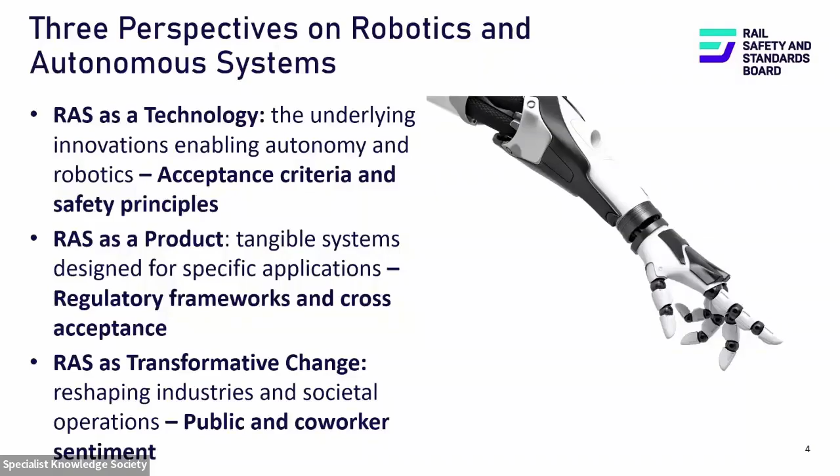If we think about robotics and RAS as a technology and as a product - I was speaking to somebody about what the solution to all of this is, and typically I was getting into details around regulation, and they said, 'Look, this is quite a simple problem, it just has to be very cheap.' I think that's what you're really talking about - once this becomes cheap, there won't be any barriers.

So it's useful to think about the archetype pathway to becoming cheap. We start with early adoption and development happening in labs - I'm sure my colleagues will tell you about the wonderful stuff they're doing there. Then you get into early adoption, high cost, niche, government investing in things, seeing it as strategic investment, and allowing this first adoption to occur.

Then scaling and competition - some degree of standardization, interchangeable components, supply chains form. RAS becomes a market in itself, a mature market. We start to see economies of scale, and standards start to develop - there already are some, but even more sector-specific and cross-sector ones.

And last but not least, you get demand driving production, and suddenly the technology is cheap enough to be in our homes. If you think about the autonomous Hoover you have in your house, all of a sudden it's in your house, and that's one of the reasons it's affordable and available to consumers.

The question is, where are we at now? We can debate this in the Q&A. Maybe we're in the early stages, specific niche applications, and the real idea is to move into that space, to get into scaling. So scaling is the big problem - there's the problem of early adoption, which I'm sure my colleagues will talk about, and people actually implementing RAS. But from a regulatory and governance perspective, the big question is, how do you scale this up?

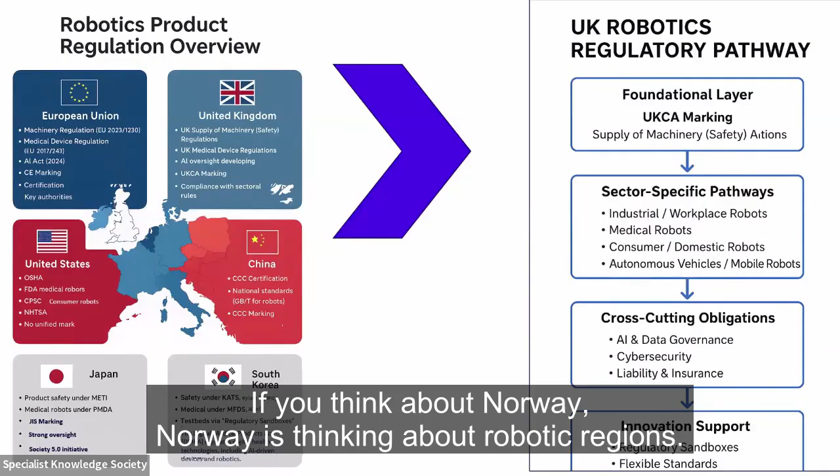So very progressive thinking. If you think about Norway, they're thinking about robotic regions. We are starting to do that with RAS hubs that the government has announced. So there's a lot to borrow and learn from other sectors, and really there's an opportunity here for the sector to improve.

We're an interesting case. I think, Mark, you talked about the fact that we are third. I've heard we are first in research. We're third in private sector investment, believe it or not, in early adoption. We are, I think, top 10 in autonomous vehicles, ninth, so we can move up, but certainly in the top 10. We're seen as incredibly mature when it comes to robotics and regulatory frameworks.

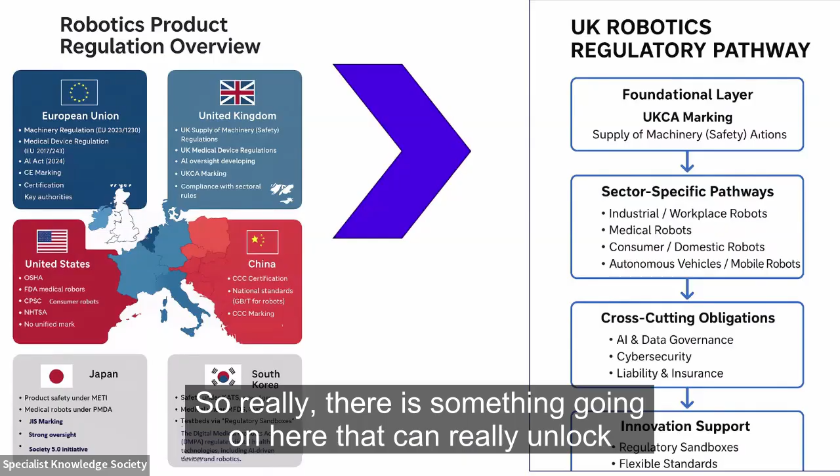But we're poor in deployment. I think robots deployed per 10,000 manufacturing workers, I think we have something like 112. And just to put some perspective on this, Korea is at about 1,000. Okay, that is the difference. Deployment, we are far behind, which does not make sense based on what I just said, how far ahead we are. So really, there is something going on here that can really unlock the potential that the UK has.

And this is why the committee exists. I'm one of the co-chairs. It's co-chaired by colleagues from NNL, from University of Birmingham with Samia Nefti-Meziani OBE. Also HSE is involved, and we are very, very active. It's a very diverse membership, with government bodies, regulators, standards bodies, infrastructure managers, covering 16 sectors of economic activity. And the big idea here is to connect regulators with organizations that are developing robotic solutions and see how we can find a way forward. I think that is the real unlocking factor here.

A brief history of the committee: formed in 22-23, worked with the ministers. There was a task group set up and a regulatory scan proposed somewhere in '24. We've had some very good discussions with DSIT and RIO and people who run those departments to see how we can support the sector and make some genuine recommendations back to ministers and people in power so they can unlock things. And we're very, very keen to work with people possibly online today or here, so please do discuss stuff with us.

Very quickly, the last bit of work we did, we talked to around 60 organizations, a lot of work, a couple of workshops to really explore what the challenges were, to really talk to the community to understand what is stopping robotics from being deployed.

And two key lessons came through. In some cases, there were some fundamental problems with the existing legislation, and legislation change is very difficult, so you have to lobby and convince government to really do that and highlight the benefits of it. And the other bit was the perception of what the regulatory mechanisms and the burdens that come with it, the concept of regulatory burdens. So in some cases, even if the regulation wasn't the factor, the perception that the regulation creates a burden, even if it's not true, was a big factor.

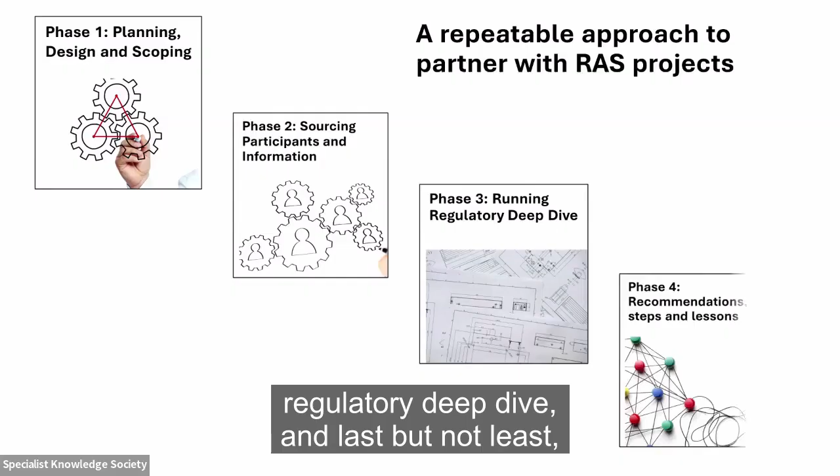The big focus is some kind of repeatable approach: really planning, scoping, designing. I'll speak a little bit about sourcing participants and information, a regulatory deep dive, and last but not least, some recommendations back to government. The idea is for this to be a repeatable process so that the committee can consistently every year work on one, two, three projects that are out there and really get the lessons out.

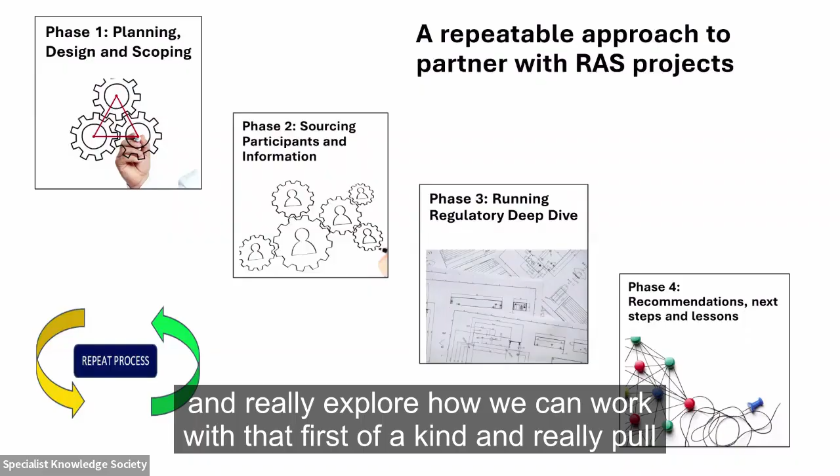The key thing I pointed out before was scaling. So the scaling could be a common application which can be moved across. It could be across regions, it could be across sectors, and really explore how we can work with that first of a kind and pull the lessons out so that the second person doesn't have to start from scratch. I think that's the key thing we have to unlock.

Things to think about that we will certainly consider is, where's the technology at? What is the technology readiness level? Are we talking about places which are ready for deployment? There are companies out there who have a robot but just can't find a place to deploy, a customer to buy it, and there's an element of proving it. Or there's an area of opportunity where some regulatory change can really unlock something big for robotics.

Cross-sector applicability, as I talked about, is quite important. Deployment environments which are common, construction sites, depots. So if you have a maintenance depot in rail, how is that different to a maintenance depot for aviation? If somebody is deploying drones there, which are autonomous, can it be done in the railway as well? What are the challenges associated with that?

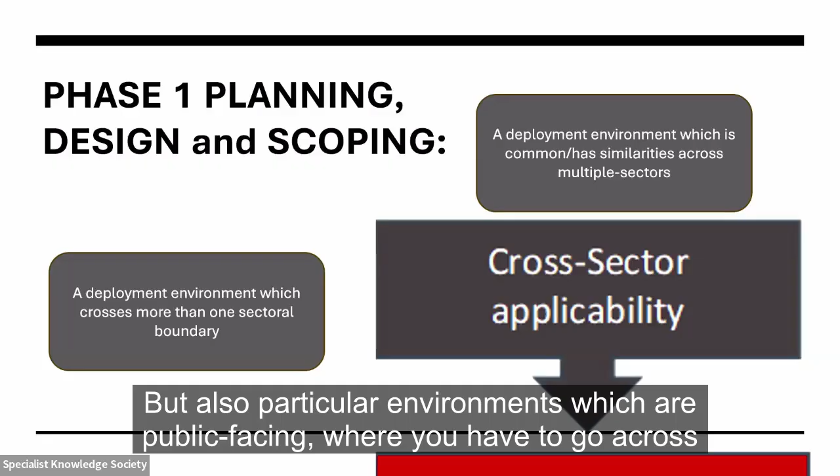But also particular environments which are public facing, where you have to go across multiple regimes - in the agri sector, if you're deploying robotics, it has to cross a road, suddenly highways aspects apply, you go to another site. So there could be all sorts of challenges associated with deploying robotics.

I talked about RAS exposure to the public - what are you talking about? Controlled environments, exposure to public. The Milton Keynes example I was talking about, a robot running around doing logistics - if you prove that, to what extent can a robot be deployed in a station environment? Discuss what are the challenges. So there's clearly room for extension, but somebody has to do some thinking around that.

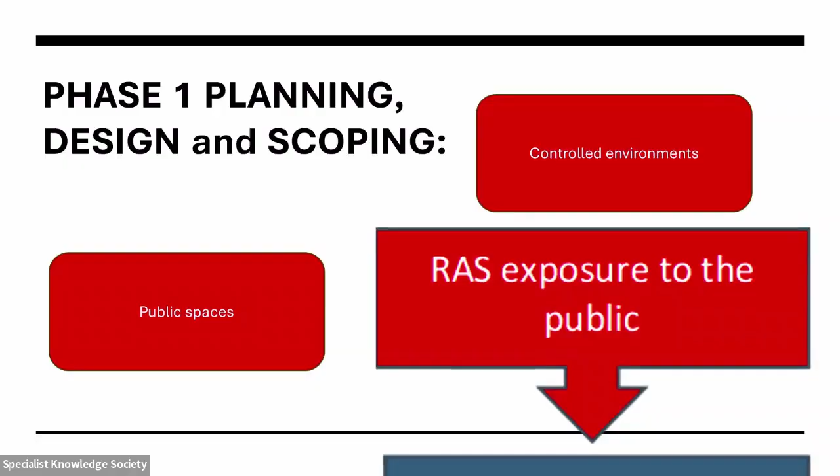Level of regulatory change - what's the problem? Is the problem regulation, or is this just the perception of a regulatory burden? Is it lack of data, risk assessments? You don't have criteria, and how can we unlock that? The committee is very keen to work with people to unlock that where possible, because we have access to regulators - I can see some of them in the audience. Hopefully they won't be too unkind to me afterwards.

The other aspect here is really the scale of the benefits. What are we talking about? Does it unlock a pilot scheme, a deployment? What does this mean for the sector? Does it position the sector to really transform and put UK on the map in relation to a particular sector or not? So I think those are the kind of considerations.

The idea is to then highlight some cases and work with them - like I said, we're working on a couple already. Just to give you a rail example: one of the things we're doing, it sounds very simple, is to explore and examine the standards that exist, operational standards for example, and really see to what extent they are ready for a robotics, for a RAS system to be introduced. Are there any challenges?

Do the people working in that environment have to do things differently? What are they? I think unless we proactively think about this and start to provide opportunities and test beds, I think we'll be forever behind. So I think there's a real chance for all the sectors to really grasp this opportunity and proactively think about it.

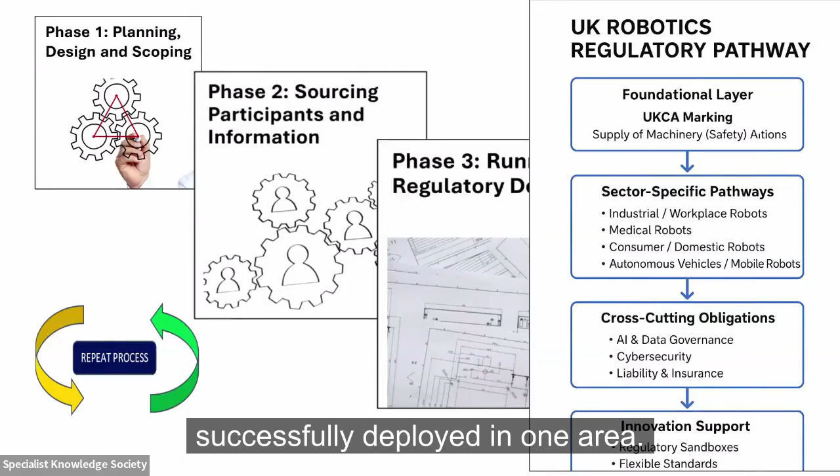Like I said, we're in phase 2 and 3, speaking to people. We'll do this again. If you have ideas, you want to work with us, please reach out. We're happy to listen. Hope is that we will get some regulatory pathways going, try and understand how a particular project has been successfully deployed in one area. What can we learn from that? How can we take it across? And maybe during Q&A, I can give you some more examples.

And the expected outcome, this is the last slide, is that we identify specific barriers, there's bits of knowledge and archetypes and knowledge products that we pick up from our experience working with partners, and that can be made publicly available. I think that's essential, publicly and freely available for projects to really use and publicize.

The committee is really there to do its job, to really put RAS on the map, but also really reach out to people who are trying to break into the market to say, is there a way we can link you back to regulators to really understand? Can we provide sandboxes? Are there opportunities here to really help awareness and support you and hold your hand while you try and attempt to implement the pilot?

So I'm not a robotics expert, but as you can see, I'm really excited by this, and I really want it to succeed. And I will pause there because, to be quite honest, I want to see all the cool videos that the rest of the panel will share with you. So thank you very much for listening.

Thank you so much for giving us a great introduction to our topic this evening, and explaining the work of the National Committee on RAS Regulation, Standards and Ethics, which I think gives you a sense of the work being done to really be proactive, bridge that gap between developers and those who understand the regulatory landscape, to really accelerate the deployment of robots that are safe and trustworthy and bring societal benefit.

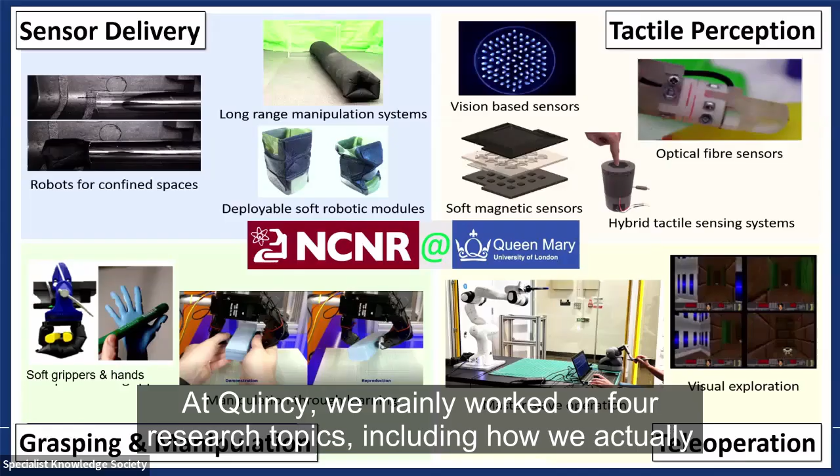So at Queen Mary, we mainly worked on 4 research topics, including how we actually deliver the sensor to the site, which is dangerous for our human workers, so then we can see the environment that we couldn't see before. We have such robotic systems with sensors, and we can deploy manipulators where we can actually grasp or pick up those dangerous objects remotely. And then we have teleoperation, which actually enables our human workers to stay in a safe environment, but precisely control the robots that have been deployed inside those dangerous environments.

And so, as mentioned, robots are smart machines. So if we want to design a machine that is smart and robust, that can be deployed or brought outside of the lab and placed in the real environment, not just in the lab, the first thing we think about is the design philosophy.

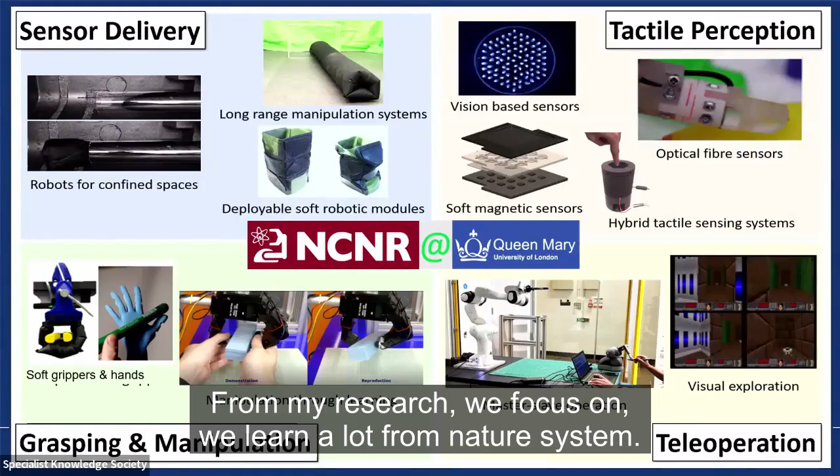From my research, we focus on learning a lot from nature's systems. If we look into our human bodies, we have rigid parts as skeleton, soft parts like tissue and muscles, and then we have our brain to control. How do we control our muscles? We learn gradually from a child, kids, and toddler. We grow up, and then we learn a lot of skills. That is what today the AI is doing.

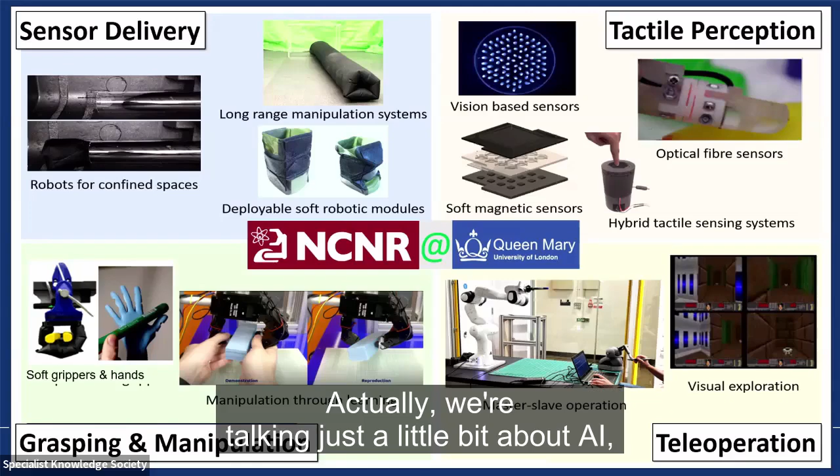We're talking just a little bit about AI, how that can be deployed to a smart robot, which is an embodiment of the AI. So here we talk a bit about how we design mechanically intelligent bodies that can do the work with very limited control requirements.

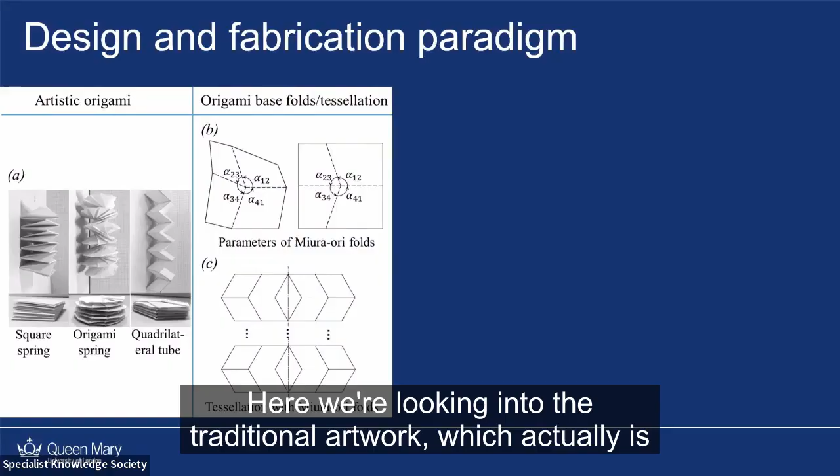So here we look into the traditional artwork, which is the art called origami folding. We learn from origami folding from this artwork, so we can understand how to use basic geometry to understand the folding from a piece of paper to a compact 3D structure.

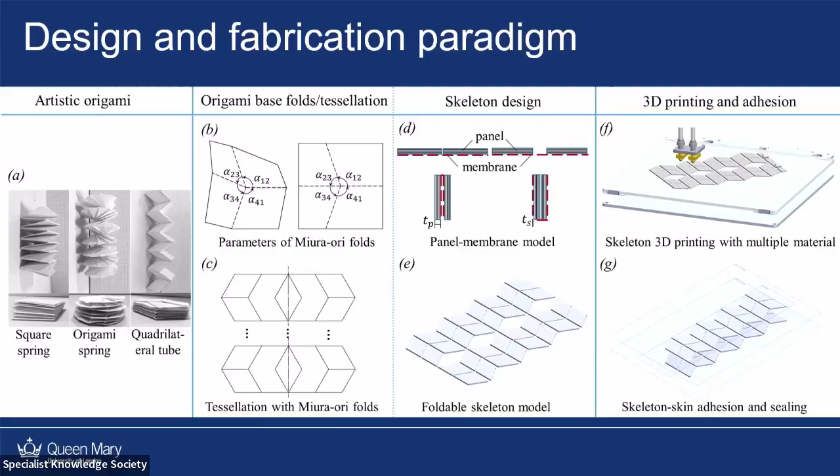And then we develop the design approach, and we can look into the new manufacturing approach, like how we use 3D printing to print a piece of flat sheet, and then we can fold it into a 3D structure.

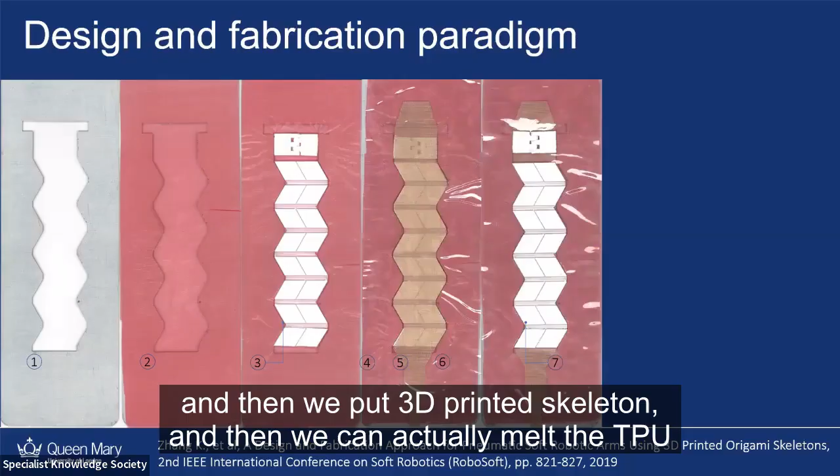We use this heat pressing manufacturing process, using plastic fabric materials. We use a very basic aluminum mold, put in a 3D printed skeleton, and then melt the TPU film materials onto the skeleton. We use other non-melting material so they can create chambers, which allow us to inflate and deflate the structure.

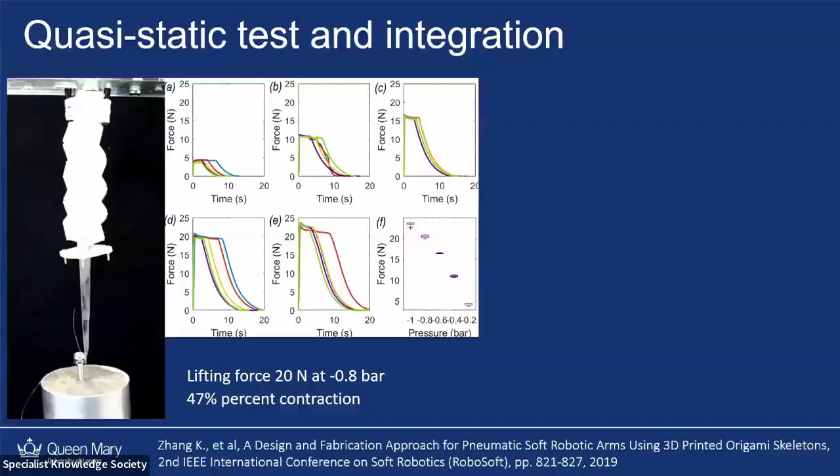So this is the whole manufacturing process, which is cheap and makes the body very reliable, with no electronics inside. And then we can make the artificial muscle here.

You can see the video - we can vacuum the muscle, and it can lift quite a heavy payload compared to its body. So this is a kind of new artificial pneumatically actuated artificial muscle.

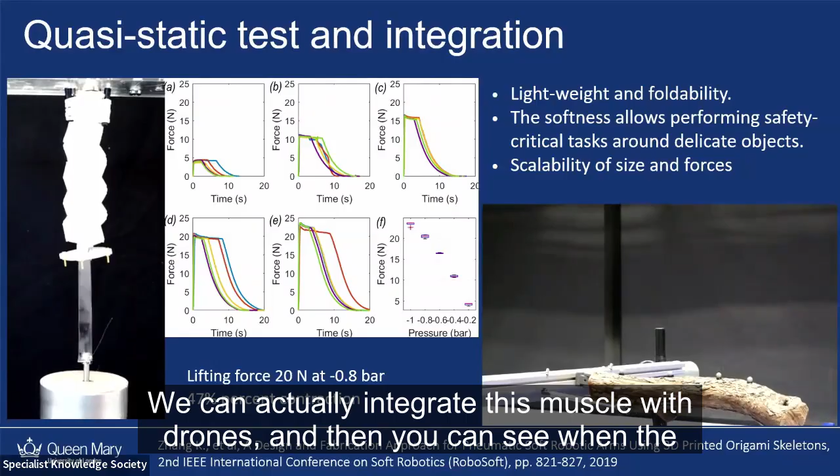So you may ask, what kind of applications? We can integrate this muscle with drones, and when the drone flies in its path it can have a kind of collision with the environment. That softness allows the drone to pass through without getting damaged from the collision.

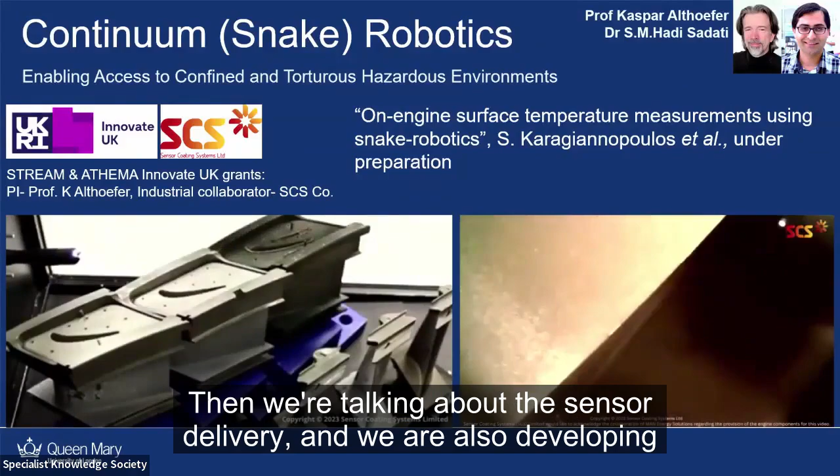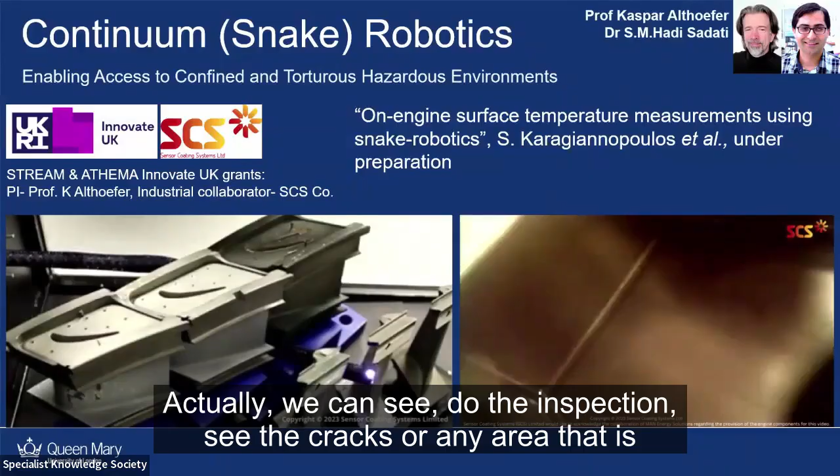We're also developing snake robots, shaped like a snake, which can go through very narrow openings. It's remotely operated with a camera - just minimum electronics put at the tip of the snake robot - and we can do inspection, seeing cracks or areas not accessible to larger robots.

This part of the work was funded by Innovate UK, led by Professor Kaspar Althoefer, who unfortunately isn't available today.

Again, what I want to emphasize in our work presented here is trying to minimize the application of electronics, which is one of the weakest parts when we deploy this type of robot in a nuclear environment, because that part is the most easily damaged.

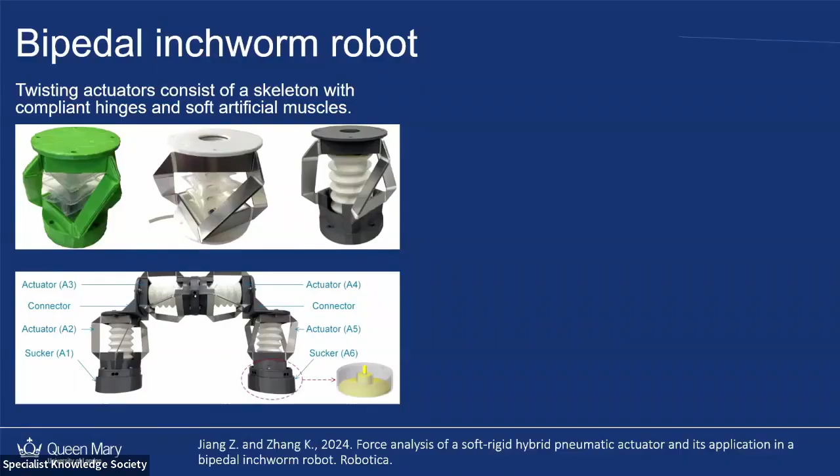So here again we look into the soft muscles and learn a bit from our human body. Our hand can do very precise grasping or gripping because of the skeleton bones in the finger - that allows the precise motion. So when we integrate the hard parts and soft parts, we make a hybrid system.

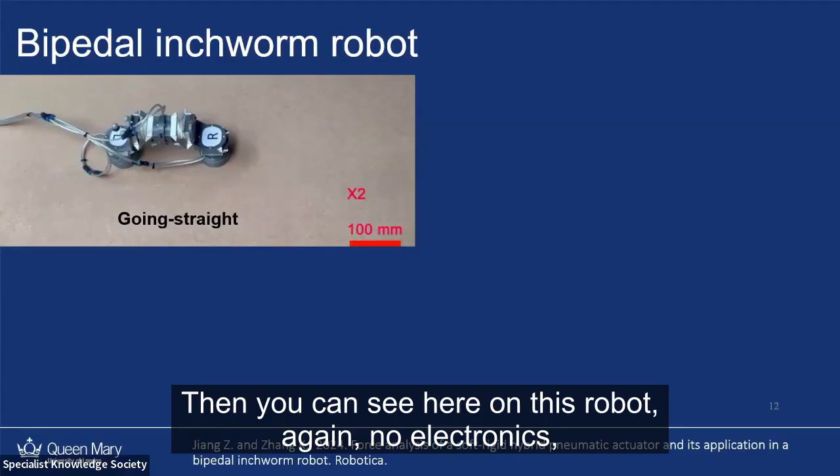And so we learned about the gait. We developed these two-legged robots, and you can see here, again no electronics - we remotely control it by pressure, air pressure, in the soft muscles. You can see we can allow the robot to locomote.

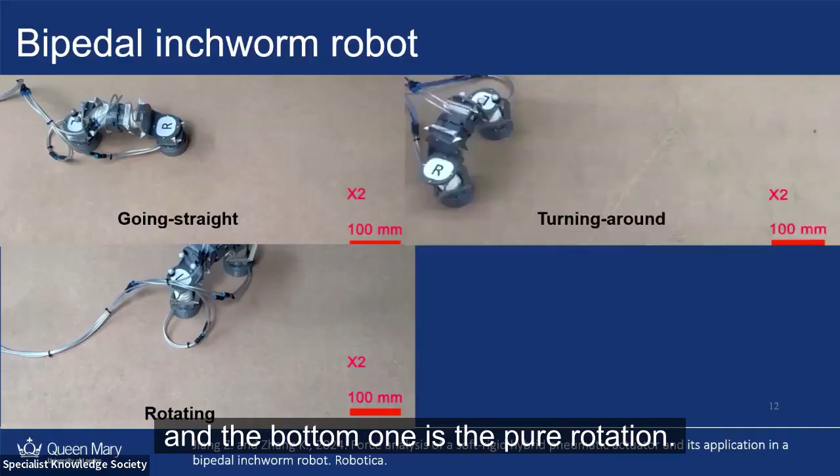Interestingly, with this same robot, we can achieve different gaits. From the top one is the straight locomotion, and the bottom one is the pure rotation. We can combine the turning, like a crab, but it only has two legs. And of course we can change between gaits, which allows the robot to navigate through narrow channels.

Here we try to provide a very narrow opening to allow the robot to go through, because it can change the gait. So again, this is just mechanical intelligence with no electronics.

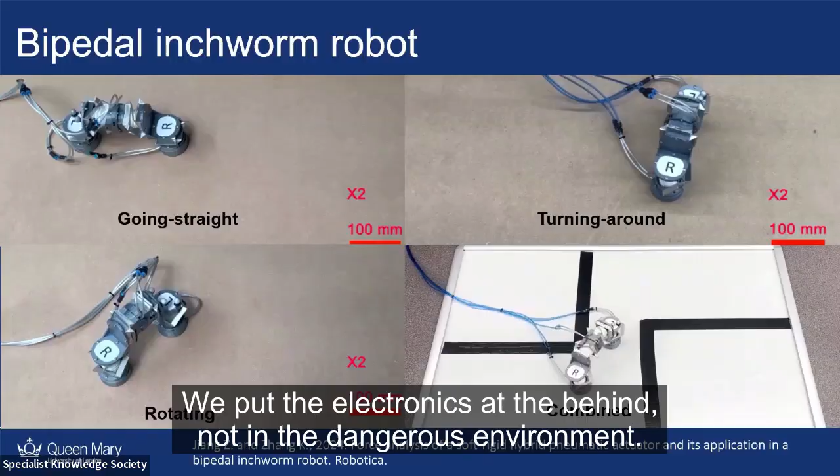Okay, and we put the electronics at the back, not in the dangerous environment.

After that, we also developed this variable stiffness device. We want the device to have different stiffness that can change, where we want them to be soft they can change to a lower stiffness, or we want them to be able to carry more payload. So this is an experiment test of this new kind of rotary joint, again powered by pressured air.

Let's move to the next slide.

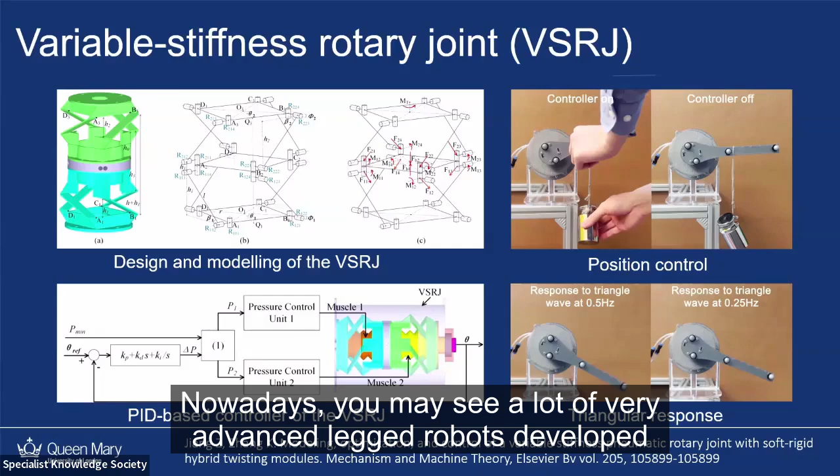You may ask, okay, what can the joint be used for? So using the joint, we developed this quadruped robot - basically a four-legged robot, and we use 8 of the variable stiffness joints to develop this quad robot. Nowadays you may see a lot of very advanced legged robots developed by Boston Dynamics or Unitree, but they all have electrical motors. For us, our aim is to develop minimalized robots with minimized electronics on their body.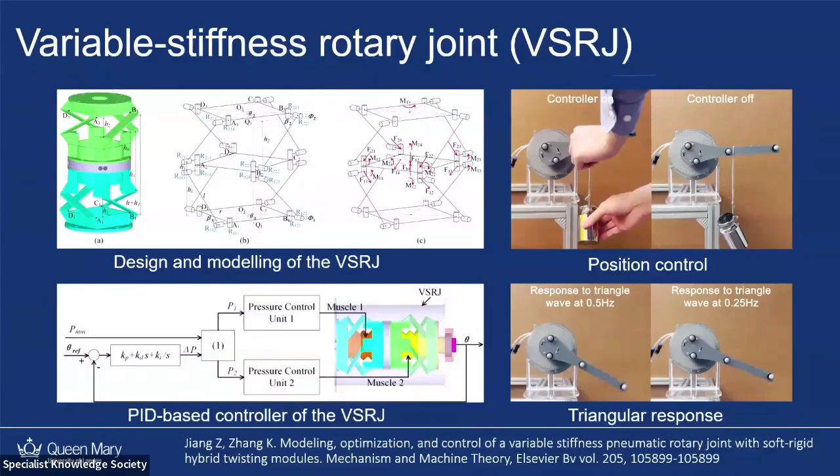We learned that pneumatics have their disadvantages - they have pressure drops, and if you have very long tubes you need very high pressure. So something always has advantages and disadvantages, and that is what we are trying to improve.

As I mentioned, we want some end effectors to be able to grasp objects in dangerous environments, so we developed this soft gripper. Inside this one we have just 2 motors - we try to minimize the use of electrical motors and circuits. All the fingers are made out of soft material, using the TPU pulse actuator to change stiffness.

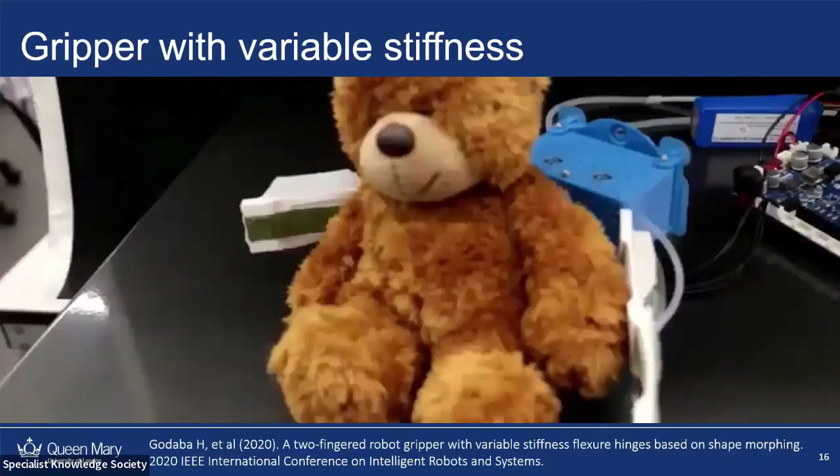If you look at our finger, the last 2 digits are coupled, so we can't bend these 2 joints separately. But with the new pulse actuator, we can actually bend that finger separately, meaning we have more configurations, and we can change their stiffness to allow them to operate for different functions.

Lastly, you may think, okay, so can these robots only be used in dangerous environments? But it's not. Here is our current work, funded by Innovate UK, as Mark mentioned earlier. Indeed, soft fingers can be used to grasp soft fruits, like red fruits, and this is our work working with Saffron Grange and Extend Robotics.

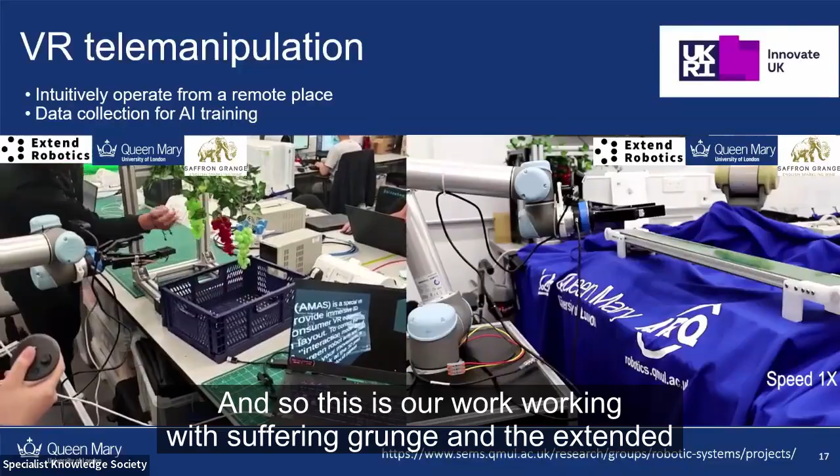Saffron Grange is a vineyard near Cambridge, and we put the soft fingertip there. It also has a sensor embedded, allowing the fingertip to test how much force is applied on the grapes or on the bunch.

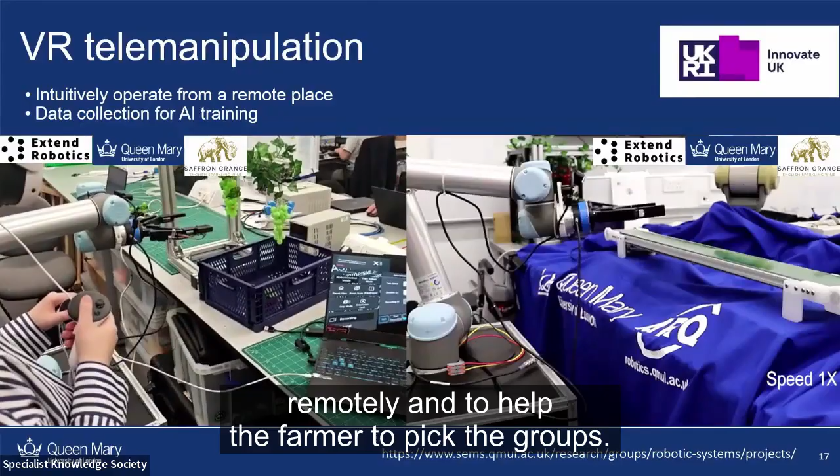Then we can use VR-based teleoperation to operate the robot remotely and help the farmer pick the grapes. But what I'm presenting here is that this robot can also be used in places like nuclear facilities, where the operator can sit far away from the dangerous environment or the operation site, but can still accurately operate the robot to pick up the bunch.

The peduncle is just about 3 millimeters in diameter, so it requires quite accurate operations.

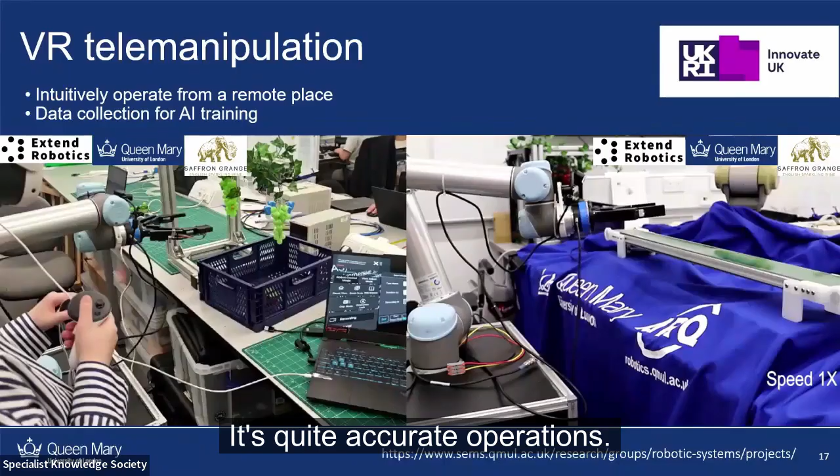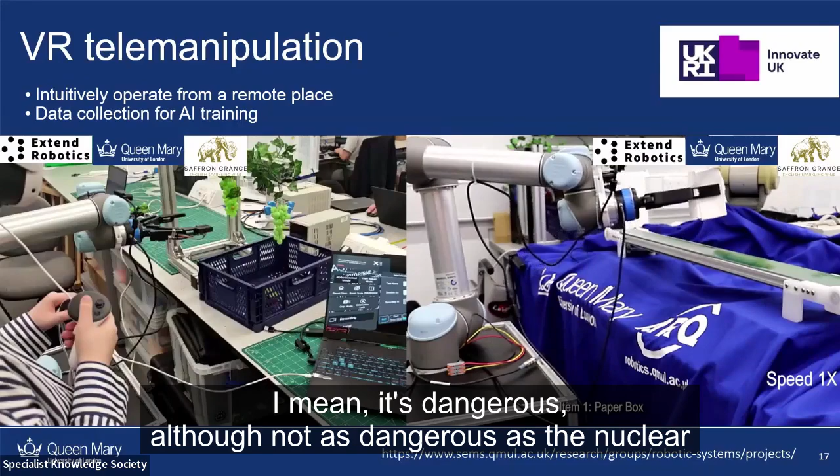We're also looking into applications like deploying these robots in waste recycling facilities, when the waste is moving on the conveyor belt. A visit to the site is dangerous for human workers - not as dangerous as a nuclear environment, but still not a nice environment for human workers.

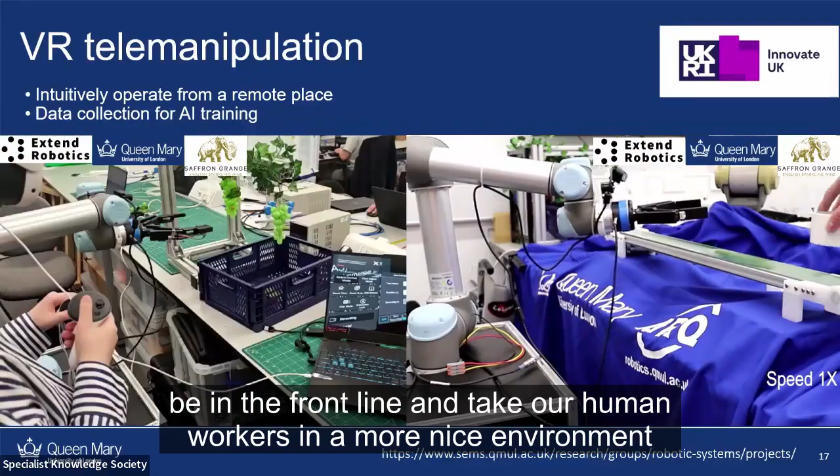So what I want to say is robots should be deployed to the environments where they should be - maybe not ready for our homes yet, but in these environments we definitely need robots to be on the front line, taking the place of human workers in a more nice environment, to reduce the risk to their lives.

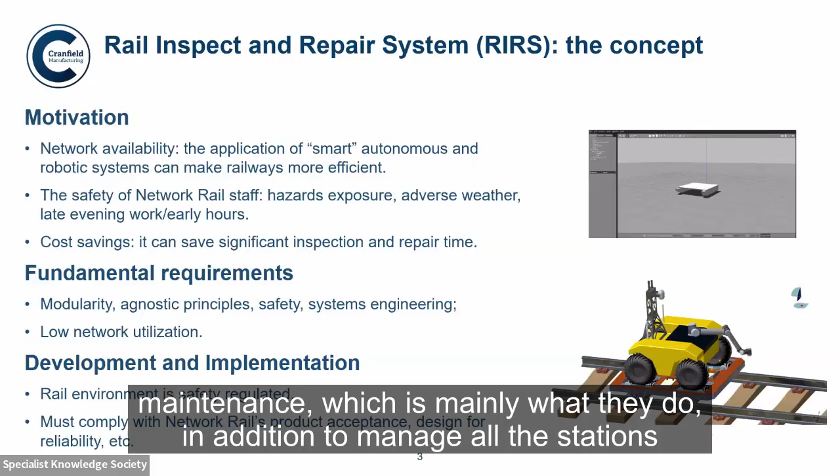The reasons for using robots for the railways are to do with safety. So you think about when Network Rail is able to perform maintenance, which is mainly what they do - in addition to managing all the stations, they also maintain the track and so on. The times they have available to do maintenance is usually in the middle of the night, and it'll be outdoors, and it doesn't matter what time of year it is - it might be raining, it might be snowing - there's a lot of difficulties with people doing jobs in this sort of environment. So this project has to do with this.

The idea of this concept is to do with this. Obviously, we can think about using robots as very efficient, and they would save time as well in inspection and repair routines. So as part of the brief for this idea, the fundamental requirements - there's a long list of requirements, but I will cite a few that are very, very clear.

For example, modularity in the design, so it will be very easily repairable. It has agnostic principles, meaning it doesn't matter if it's an unmanned ground vehicle or a drone or some other form of platform. It will also be agnostic when it comes to the type of task it will do - it's sort of like a free concept in that sense.

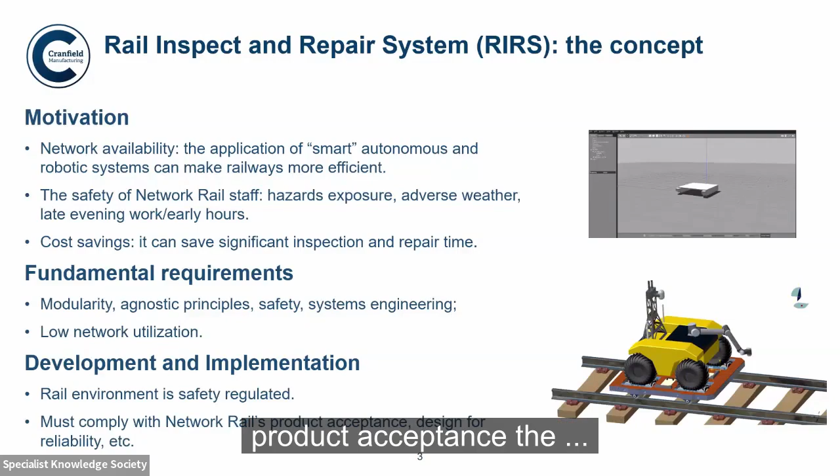The idea, obviously, is that it reduces the time machines are there to do maintenance, because these vehicles can jump in and out of the track, so the track becomes free. And, as we heard today, there are a number of safety regulations, and this is quite important for the railways. We must also comply with product acceptance, design for reliability principles, etc.

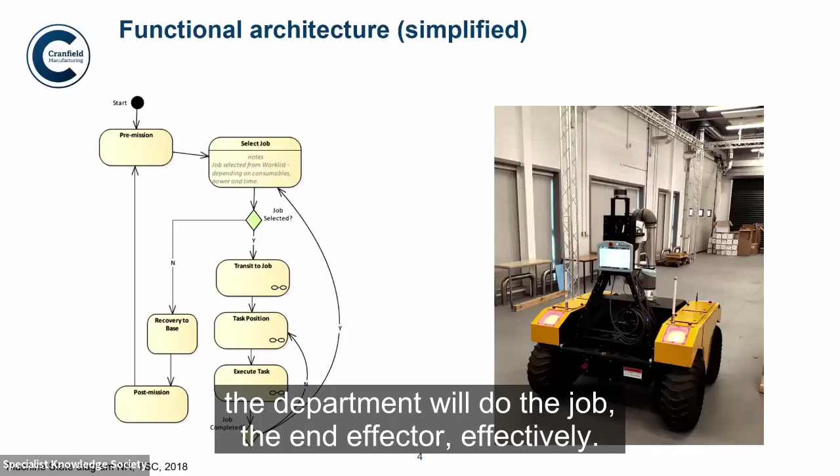So the principle of it is very, very simple, and I simplify it even further. The idea is that a robot, a machine, can take a list of jobs that need doing somewhere on the track. It will address one, travel to site, position its machinery - the end effector, effectively - and then execute the task. On completion of the task, it will say, 'Supervisor, I completed my task. What would you like me to do?' 'We'd like you to go back to central, then carry on with the second task.' And that's essentially what the concept is.

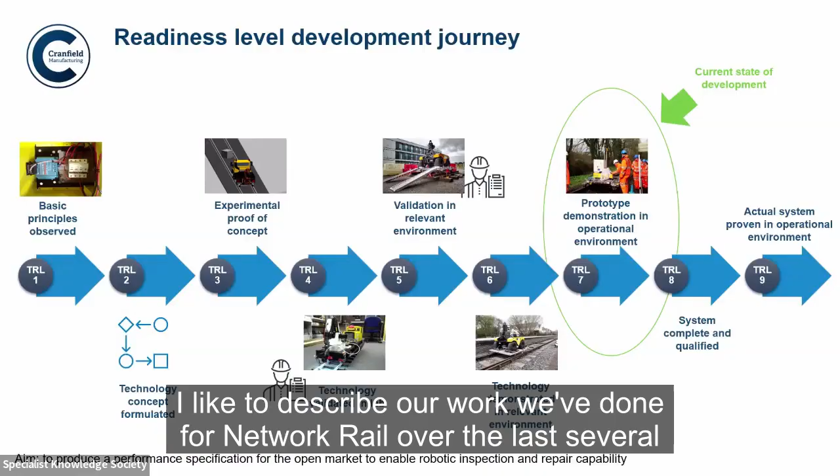We don't work with some of the robots, but this has taken us a number of years. So I'll describe this - I'd like to describe the work we've done for Network Rail over the last several years, like the journey of development.

So very early on, they developed the concept, and we were involved back then with technology readiness level 1 and 2. This was done alongside University of Nottingham and the Transport Systems Catapult back then. We became involved in the experimental proof of concept, technology readiness level 3. As we speak, we are at technology readiness level 7.

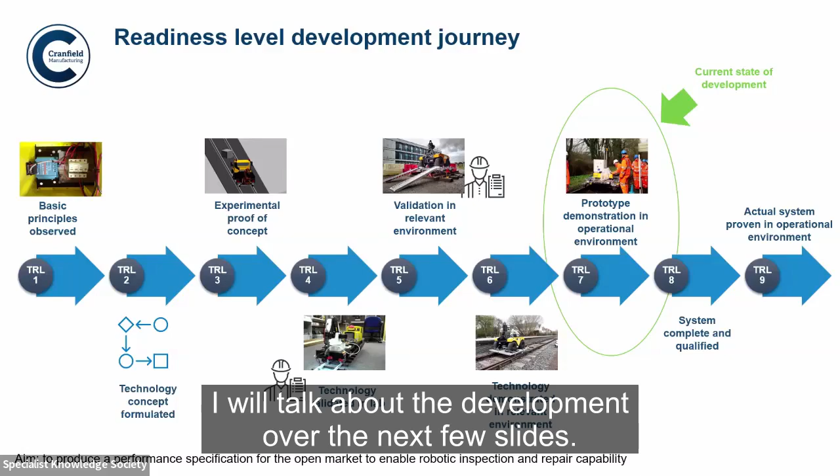To make sure that we attain the levels, we developed a tool based on the railways readiness levels. So every time we attain a level, we provide evidence of ticking the boxes for the readiness level marks that we have. I will talk about the development over the next few slides.

Like I said earlier, we started with a model. We validated the model. This model is not quite a digital twin, and the language wasn't there 7 years ago, but it's a gazebo model. It allowed us to test some of the principles, whether, for example, it would slow down when it came upon an obstacle, as shown there, and so on.

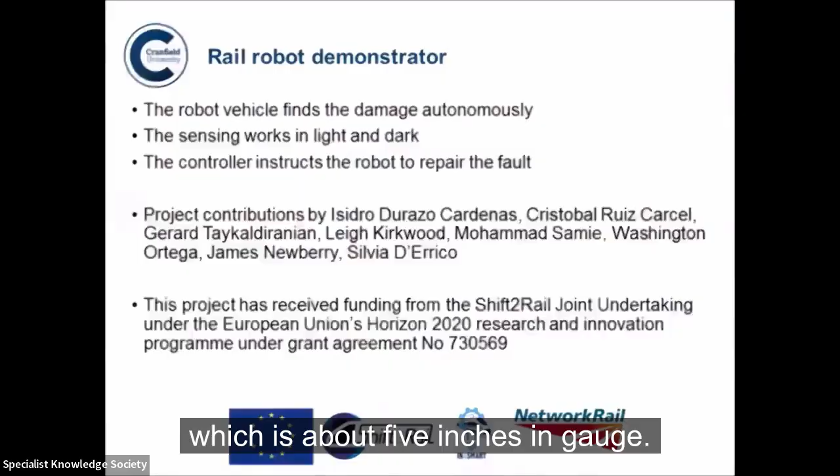So we did some verification and validation of these, but then someone said, well, this is all software, you need to do something that actually is a something. So we first invested in a sort of 1 meter train, about 5 inches in gauge. It's a little bit of a toy, as you see there, but it's autonomous.

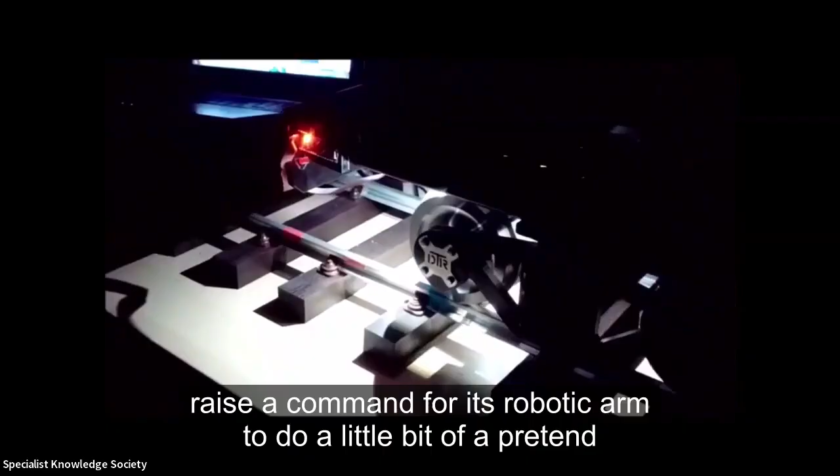The thing actually travels on its own, and it will carry on until it finds something of red color, which we place there to mimic a defect. It will find a little spot or sticker in red color, and then it will raise a command for its robotic arm to do a little bit of a pretend repair on a bit of track. So you've seen some of the bits in there.

But again, someone said, well, that's just a toy, let's do something more realistic. So we moved on. The next step is technology readiness level 5.

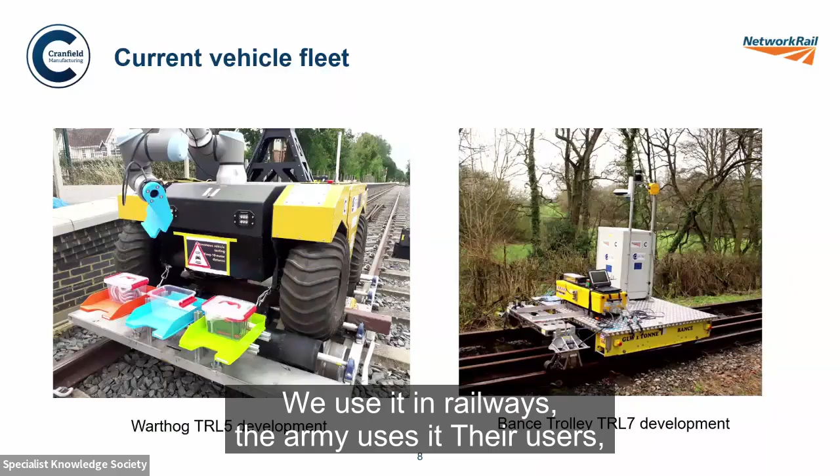For that, a workhorse vehicle that you see on the left was acquired. This comes from a company called ClearPath in Canada. We converted this into an autonomous vehicle. It comes with a joystick and is used for a variety of uses. We use it in railways, the Army uses it in their uses, other people use it in different things.

We converted it into an autonomous vehicle. So now it takes an order, like explained earlier from the concept, and then goes and performs that task, positions itself, and so on. So that took us up to technology readiness level 5.

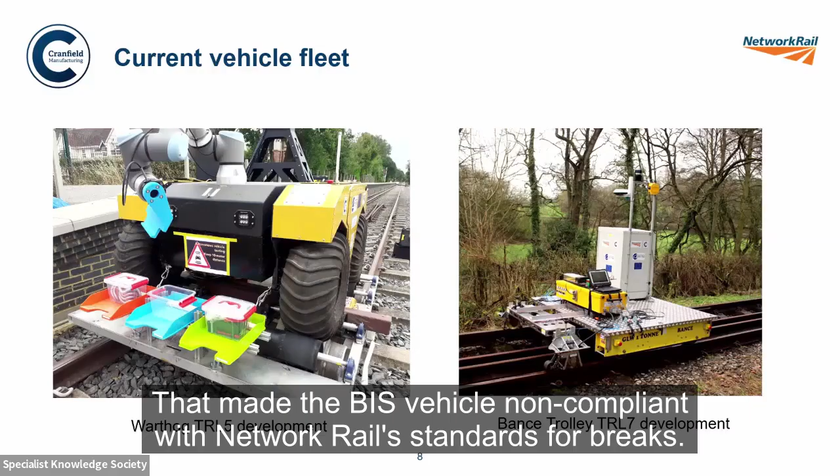But one of the difficulties we have with this is that you notice it's using a platform to ride on the track, a trolley effectively, because its width is not quite there to fit between the tracks. So that made this vehicle non-compliant with Network Rail's standards for brakes. So we had to stop with that vehicle, and then we constructed the next version of it.

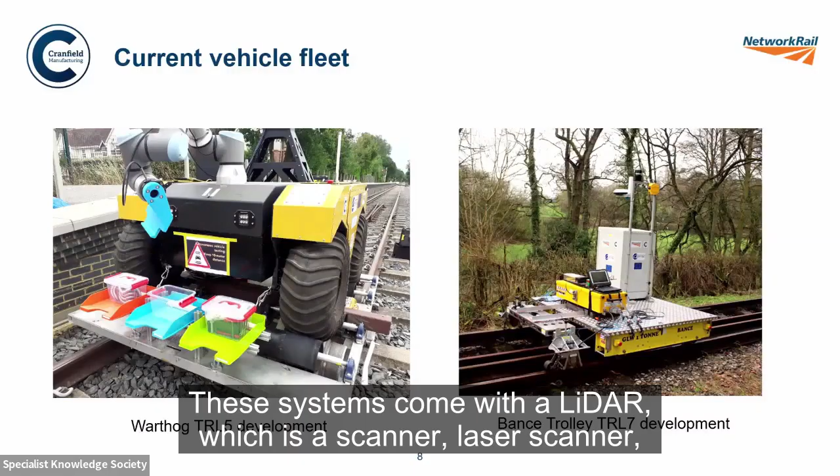This incorporates a trolley that's actually already sold in the market. Again, it's something that's operable with a joystick, but we convert it into an autonomous vehicle. The gray box that you see there contains all the brains for it. These systems come with a LiDAR, which is a laser scanner, and we use that to detect obstacles.

It does come with a series of cameras. Cameras are for the supervisor to see what's going on, but also to identify objects, we use that for that purpose. In this particular instance, it comes with GPS as well, but we fitted it with the latest AI machine inspection. This is an ultrasonics machine. What it does is capture data from the ultrasonics and send it up to the cloud where it's analyzed.

You notice that we tested this already up to technology readiness level 7. And for that, we had to go to a heritage railway, a tourist railway essentially. We did that because current regulations don't allow us to use a real track, so we had to use the closest situation to what a real railway is.

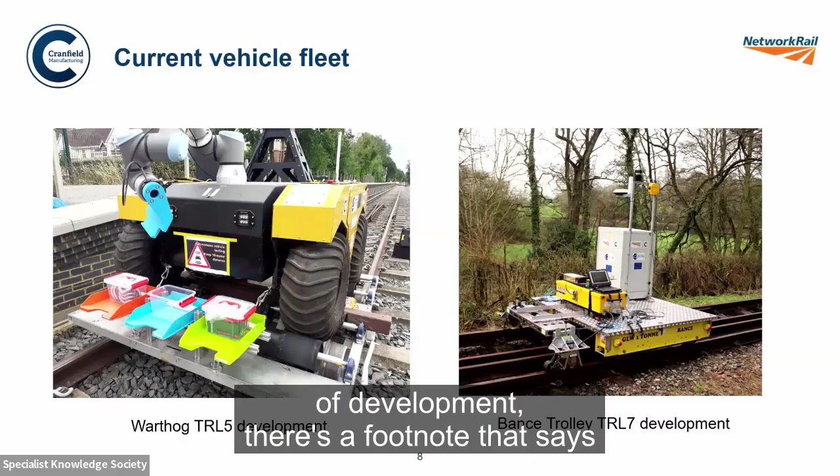Before I move on, I forgot to say something that's quite important. So I'm not going to jump back, but I will say that when I show my map of development, there's a footnote that says the exploitation route for what I'm showing today is for us to provide a spec for the supply chain. That will be the exploitation route for this, because we want to encourage the exploitation of these technologies.

So Network Rail will say, here it is, anyone that feels able to supply this will eventually do this. We also, to an extent, are giving this away so it can be achieved.

So the next case, and the reason we tested in a heritage railway, was to demonstrate that this could be used for ultrasonic inspections. Network Rail already does ultrasonic inspections, but what they do is use a train that runs at about 30-40 miles an hour. Whenever it thinks it found a defect, like a crack, it flags it, and that's all it can do. Then a person will pick up the report and go find that, but it's a person that does it with manual equipment.

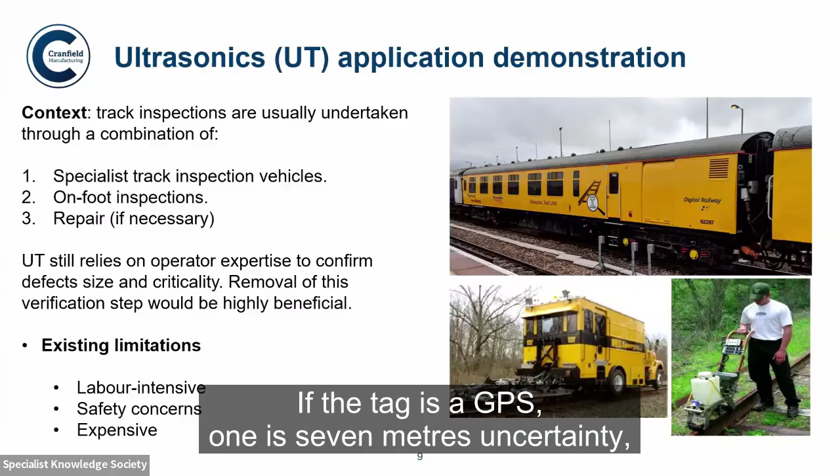If the tag is GPS 1, there's 7 meters of uncertainty, so this person probably needs to walk 7 meters, and the resolution isn't as good. It needs to go on the other side of the track for the other 7 meters, so there's a sort of hidden element - it needs to find it. So part of what we're trying to do with the machine is to remove that step.

So that's how we set up the test to carry on that demonstration. We've done this already in a heritage railway - this is Derbyshire, an aerial view of the test. We ran this over 250 meters, and there were some defects on the track that we were to inspect.

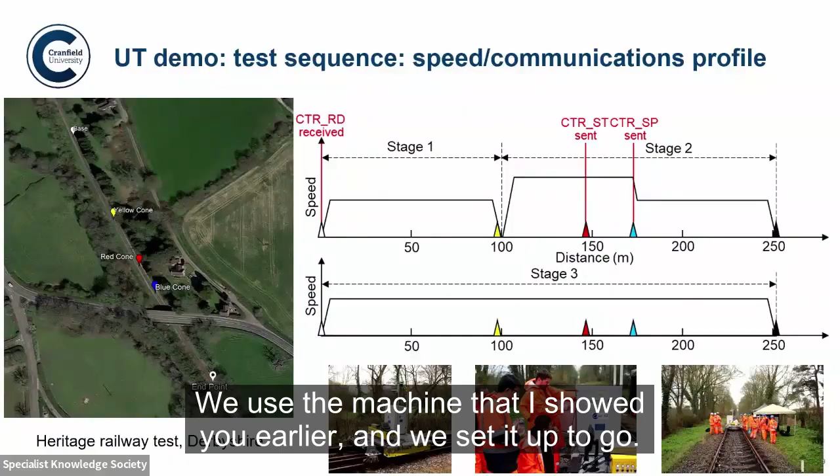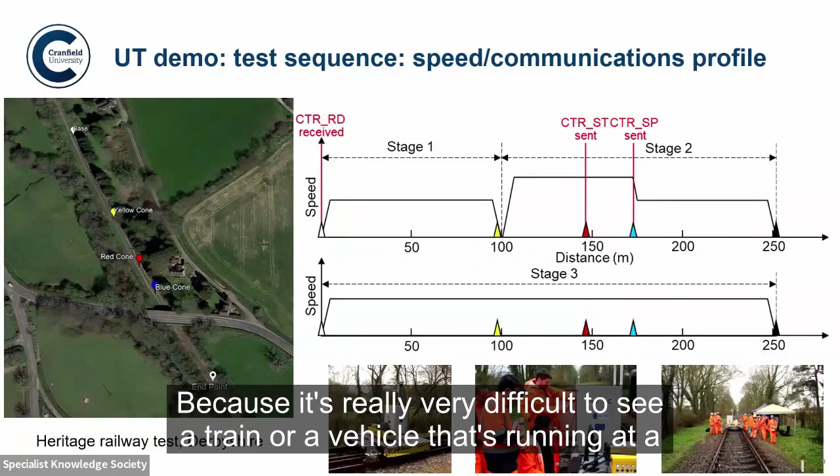We used the machine I showed you earlier and set it up to go. You see we indicated these with cones of different colors, meaning where defects are and where the vehicle communicates with the integrated AI inspection kit - since it comes from a different company, they've got to talk to each other. The cones allow us researchers to figure out what's going on, because it's really difficult to see a train or vehicle running at a certain speed and know what's going on - you only see it moving, but it's actually doing its work. That's part of the reason we have cones.

I do have really nice videos of this, professionally made, almost like a documentary, which I have links for at the end of my presentation. I'm not going to show them here, but if you share the presentation, you can look at these videos yourselves.

So the results of this inspection were fantastic. All of the defects that were seeded - noting that this is the same site where Network Rail qualifies their inspection machines - we found all of the defects that were seeded for it. There were some limitations in the work we did, though.

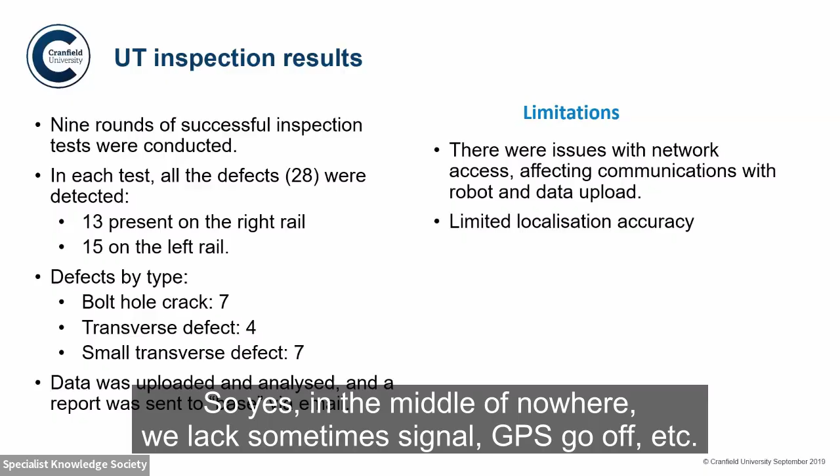Like I said earlier, we were using a system that uses AI and the cloud for diagnosing. So yes, in the middle of nowhere, we sometimes lack signal, GPS goes off, etc. This is the kind of thing you find when testing things outside the laboratory - a little bit of problems with localization as well. There are ways to improve this, and we're not going to deal with all of the issues, but we hope the supply chain can also chip in.

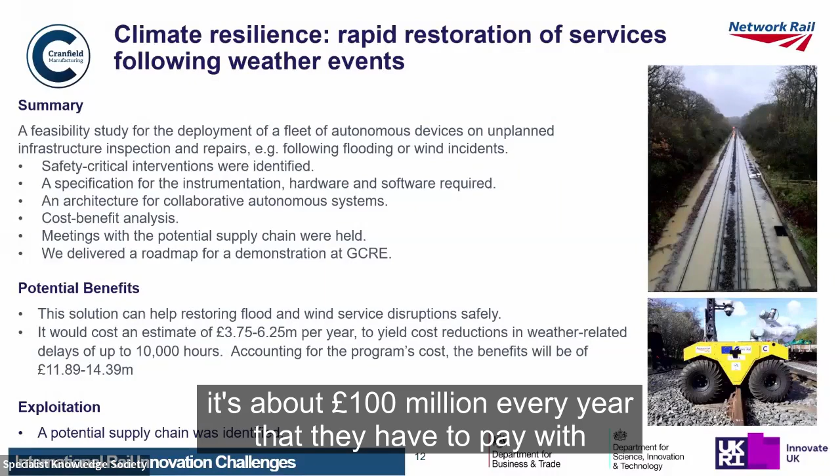Other projects we've been involved with concern climate resilience. If you look at data Network Rail publishes, it's about £100 million every year that they have to pay for issues with flooding or wind and things of that nature. Sometimes a branch or tree falls onto the track, causing a lot of disruption. And if a train is delayed, the following train is delayed, and so on - it's a big thing.

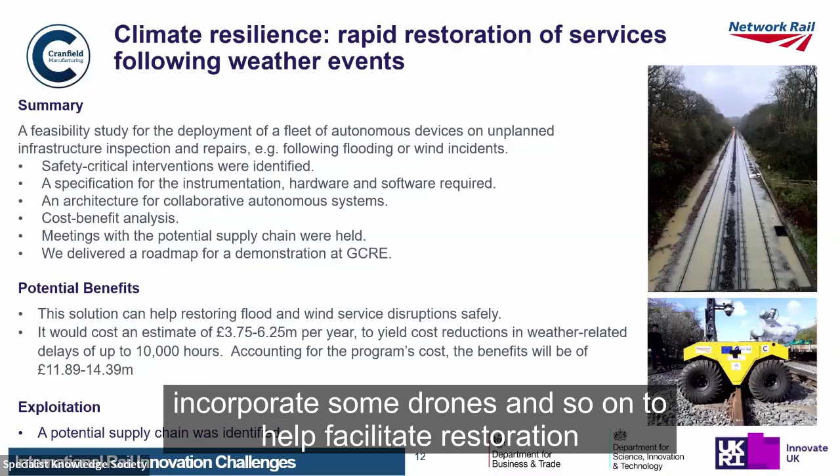So we've been investigating this with some funds from Innovate UK. We've come up with ideas for how we can use our machines with robotic arms to remove fallen trees, for example. We've also identified some of the most critical flooding issues and how we can set up a swarm robotic system, which might incorporate drones, to help facilitate restoration of services as soon as possible. That's the latest idea we'll be trying with Network Rail.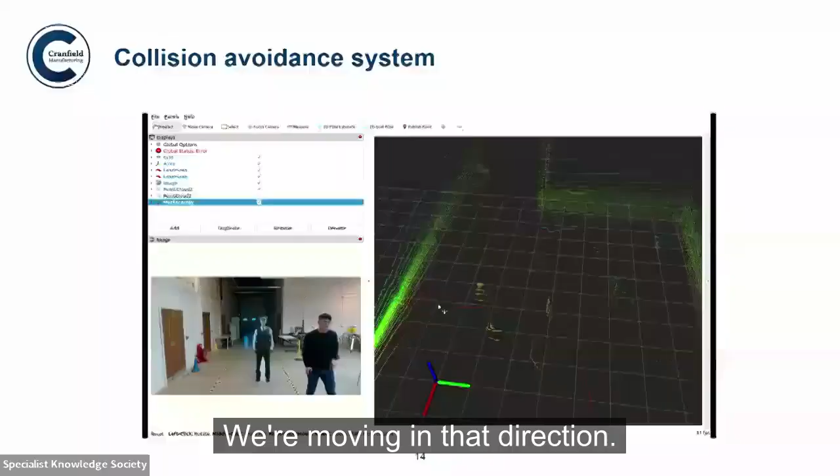Another thing we do is collision avoidance systems. We claim it's friendly, it's collaborative with people. You can see one of our students there - he uses cardboard as a second obstacle to simulate another person, because we don't find many people who want to stand in front of a moving robot for these demonstrations. We also have a 3PO and an R2D2. What you're seeing here is LiDAR characterization of its working, the distance between the machine and the moving obstacle.

Alongside this, we have - okay, so this is another video showing the camera on the robot and what it's doing. You see a lot of text in there, but what we're trying to do is teach our robot to differentiate between a trespasser and the action it should take. This is one of our researchers pretending to be a trespasser, so the machine will stop. Then once he moves out, the robot will carry on working. All done on its own.

But also we will have workers, and so another student will pop in on camera shortly. What the robot's intended to do is slightly different - it will tolerate a person wearing a high-vis as someone it can collaborate with.

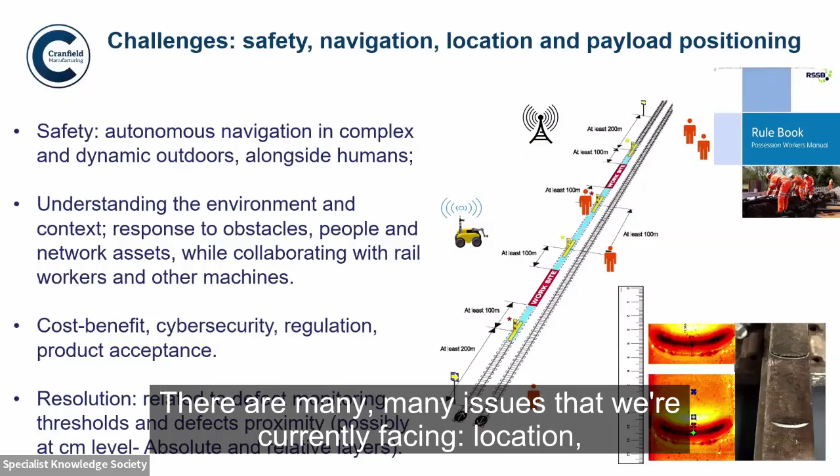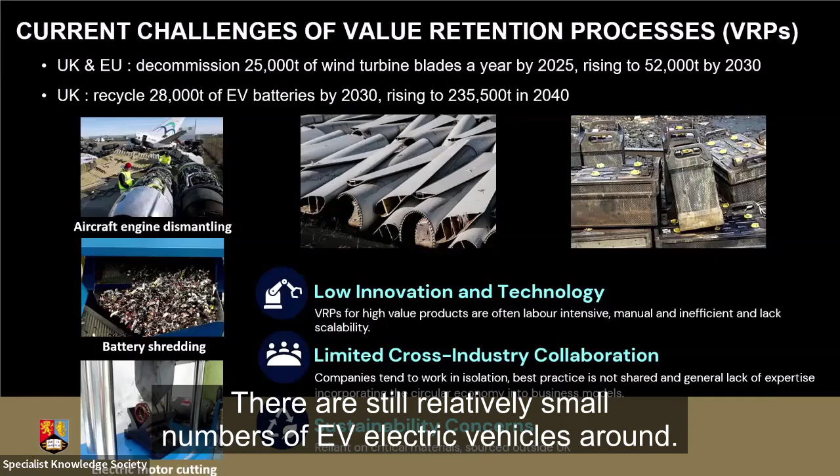A similar one we hear about - there's a lot of EV batteries. There are still relatively small numbers of electric vehicles around, but if the targets the government is aiming for are met, there's going to be a real problem with EV batteries that need dealing with at the end of their life. We're not talking tens of years down the line - this is a problem that needs addressing now.

The challenges we're looking to address here are that when it comes to dealing with these processes, the technology and innovation is actually relatively low. Where this processing of products is done, it tends to be very manual, very labour intensive, particularly inefficient. It lacks the ability to scale up, because if it's a manual process, yes we can throw more people at it, but that's not really a realistic solution.

There is limited, if any, cross-industry collaboration at solving these problems. Individual industries might be looking at it for a particular product, but they're not looking at it in a holistic way and working together to come up with solutions that can be rolled out across multiple sectors.

And then one of the other big drivers behind this is sustainability concerns, particularly around critical materials. We don't mine critical materials in this country - we're reliant on materials from other parts of the world that we have no control over, often unstable parts of the world. So how can we overcome that? Well, one way is to actually recover the critical materials we've got in our end-of-life products and reuse them - instead of mining for materials, we can effectively mine the waste and recover the critical materials from them.

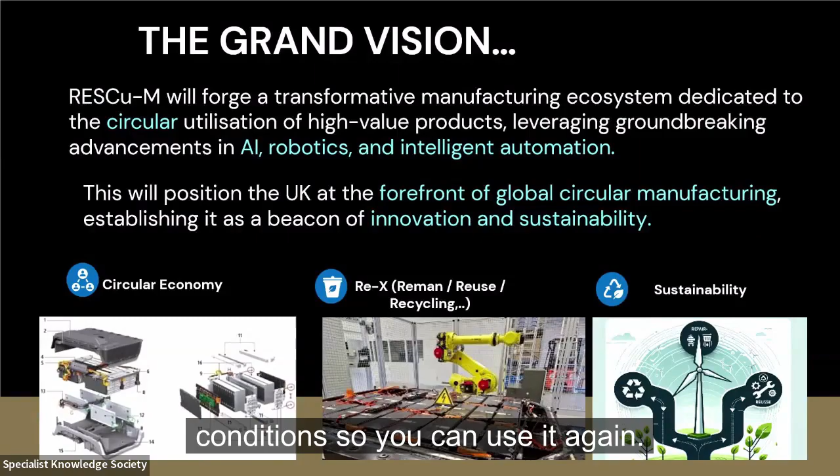Remanufacturing contributes to the UK economy, and that could increase enormously. If you're not familiar with the idea of remanufacturing, it's effectively taking a used product and restoring it to as good as new condition, so you can use it again. That's one of the things we're looking at as part of this hub, and we already have experience of it in Birmingham. I'll show you an example of that with a case study.

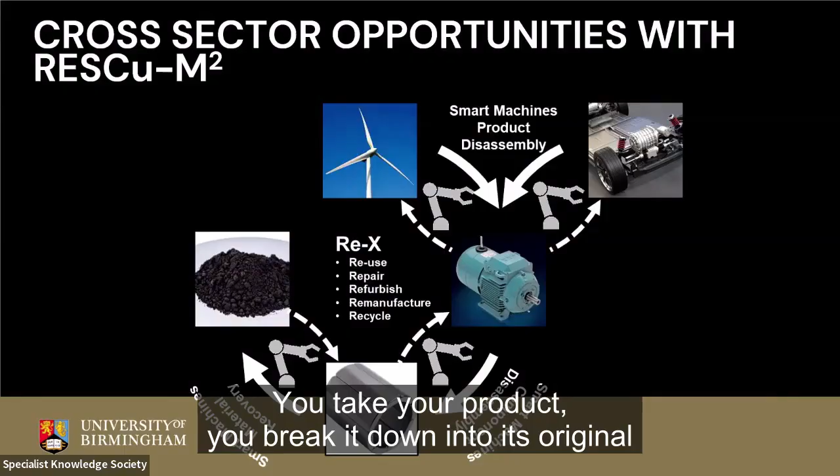So this is the case study I referred to. What we've got here is an example of a turbine, for example, or it could be an electric vehicle - something with an electric motor or generator in it, containing magnets. At the end of the life of that product, what we can do is recycle it. We're all familiar with recycling - you take your product, break it down into its original materials, and those materials can be used again. But actually, is that the best thing to do?

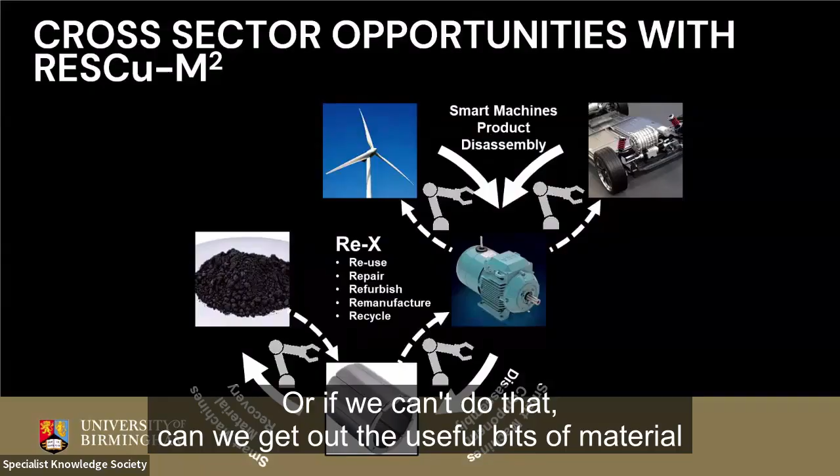It's better than throwing it away, but the amount of time, money, effort and energy that has to go into that is not necessarily the best thing to do. So actually, it's much better if we can take that motor out of the EV and just remanufacture it - return it to new without taking it down to its individual raw materials, repair it, remanufacture it, use it again. Or if we can't do that, can we get out the useful bits of material, like the magnets, and reuse those?

So you can see we've got various different pathways that the product can go through here, with recycling at the far end, but there are things that are potentially better to do before we get to the stage of recycling it down into its raw materials.

So we've set ourselves two grand challenges here. One is to radically transform the sustainability of critical materials use, as I've mentioned. Can we get the critical materials out of products so we can use them again? So in the example there, can we get the magnetic material out of an electric motor at the end of its life, or the materials that make up a battery, for example? Can we get those out and use them again?

The other thing we're looking at doing is radically improving the productivity of what we call the re-X processes - our recycle, remanufacture, repair - all these processes I've mentioned. Where they are done, they tend to be done manually, and there's very little in the way of robotics and automation within that area. So yeah, these are our two challenges - one about the materials, one about the technology, or lack of technology, to achieve this.

So we've got three work packages that I'm going to go through in a bit of detail, just to tell you what the hub is actually doing overall. We've got four technical themes here. One around sensing and inspection, and things like digital passports.

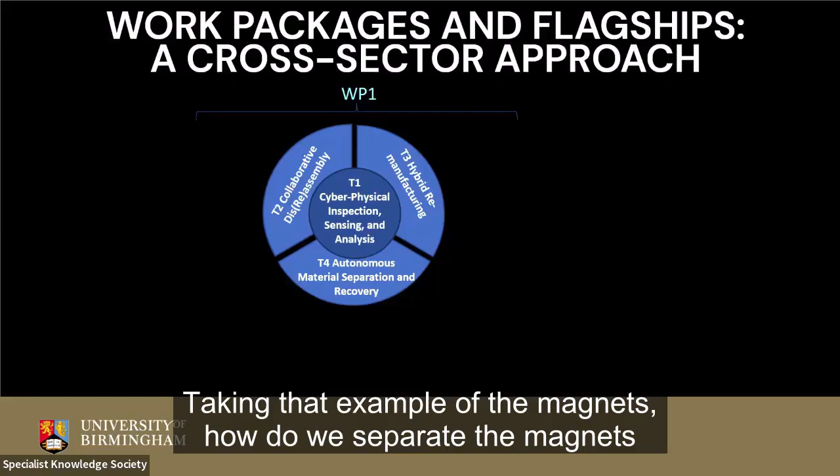We've got a theme around separation of materials. So taking that example of the magnets, how do we separate the magnets from resin potentially that they might be embedded within an electric motor, or the sort of carbon in a battery? So those are our technical themes.

But we've also got three non-technical themes that support this. I mentioned about products not being designed with end-of-life processing in mind, so we've got a theme actually looking into that. We've also got testing and validation themes, everything we've got to do has got to be proven and validated.

And then we've got a theme running throughout the project, which is actually looking at business models. How do we encourage and help industry to incorporate the changes we're talking about here into their business model? And we're going to demonstrate the technology developed here in a number of industry-led flagships.

And as I mentioned, this is very much cross-sectorial. So we've got an industry flagship around energy, one around medical, one around electric drives, and one around large structures. And then we have a community building activity that goes on top of that.

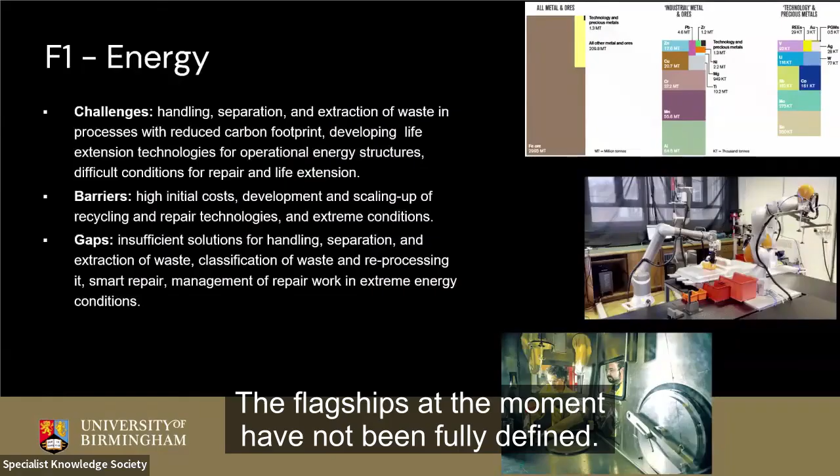So just very, very quickly, I'm going to talk about some of the flagships. The flagships at the moment have not been fully defined - we're in the first year of the 7-year project. So we're working with our industry partners to actually set up flagships that demonstrate the outcomes of this work.

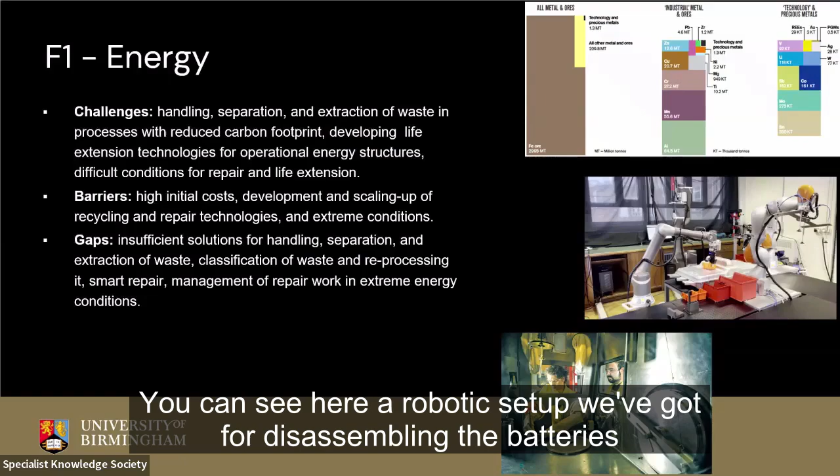But potential examples in the energy area could be things in the nuclear sector. It could be some of the work we're doing around disassembly of electric vehicle batteries. So you can see here a robotic setup we've got for disassembling the batteries from a Nissan Leaf. So this is one area.

We have a flagship around medical. So one of the flagship suggestions, or one of the projects here, is actually with Diabetes UK. Can we take diabetes tests and, instead of them just going to waste, can we recover material from those?

And some of the challenges there are, how do products actually degrade? If you use a plastic container over and over again, how does it, in the sterilisation and cleaning process, degrade? How many times could you potentially use that product before it cannot be used again? So there's all sorts of challenges around healthcare.

The electric drives flagship - this could be something like a small electric motor, which might be very high volumes that need processing, so needs to be processed quickly. And then at the other extreme, we're looking at the electric generators from a wind turbine, for example, which are much larger, much lower volume, but incredibly dangerous because of the sizes and forces involved in the magnet. So it's the sort of thing where you don't want a person doing that sort of disassembly.

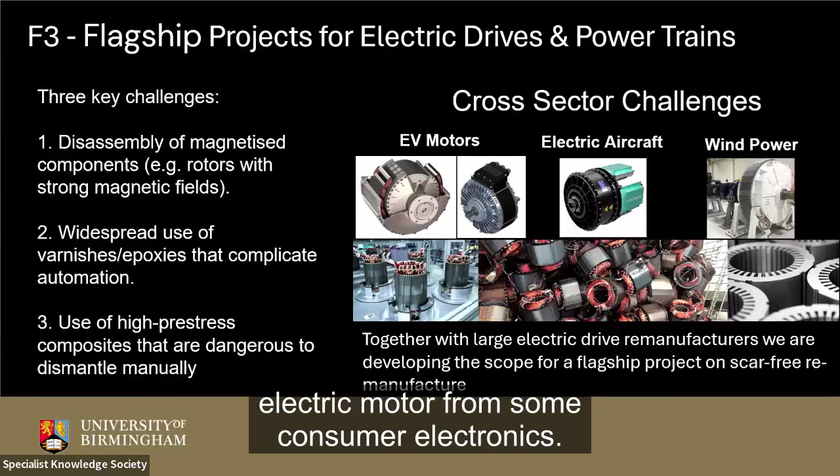And that again could be across multiple sectors. It could be an electric motor from an EV, it could be an electric motor from potentially in the future aircraft, or it could be a really small electric motor from some sort of consumer electronics.

And then flagship around large structures. This again hasn't been fully developed, but some of the potential areas is potentially one around aerospace. So where we've got carbon fiber structures, for example, increasingly being used in aerospace, much more difficult to reclaim those materials than a traditional metallic aircraft. So how can we separate the resins and the carbons, for example carbon strands, to use them again?

And so that could be an aircraft wing. Similarly, it could be a part of a wind turbine blade, for example.

So this comes back a little bit to touch on what the National Committee is doing and how that ties in with the hub. As you've heard from the first speaker, we're not just looking at the technology here - we're actually looking at the obstacles that are preventing what has been done in the past actually reaching industry. The hub is looking at the low TRL research, but obviously we're really interested in how this gets to industry. We want to get this to innovate projects to take it to the next level.

We want this to be deployed in industry. But as you've heard before, there are obstacles around regulations and standards and things that make that difficult for us to achieve. So different sectors having different sets of regulations - a solution that we would like to apply across multiple different sectors may meet different standards, different regulations in each of those sectors.

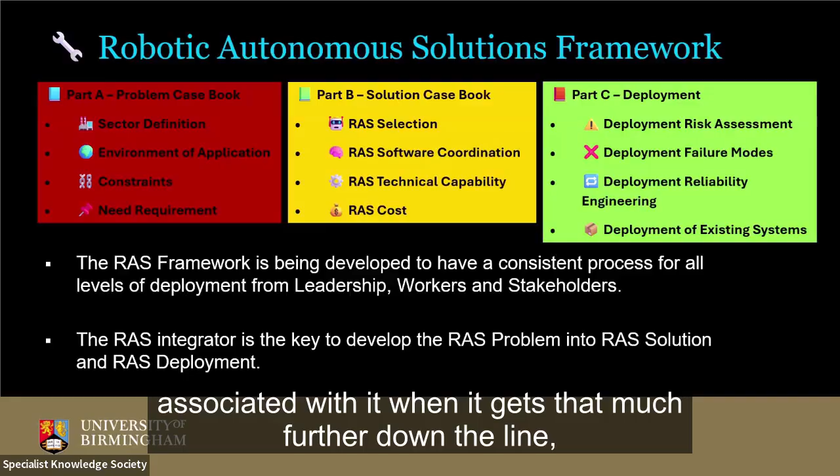The framework is also developing some different pathways - requirement pathways, looking at regulation, setting up regulation pathways and standard pathways that guide the work being done, and then also providing support.

One of the things the hub is looking at doing is actually providing a sandboxing case study that can be used to help this work done by the National Committee actually be exploited in a test scenario.

So just to finish, there's a number of questions that have come out of this work. How do we bring the cross-sector RAS community together to help improve innovation for everybody, rather than some of the work that might have been done in the past in silos?

And how do we encourage the whole life deployment of RAS from its design stage, but also consider all the way through to end of life, when the technology and products we're developing have to be disassembled?

But also, this is a journey that everyone has to go on together. So we've got to make sure that the stakeholders, the leadership, the regulators, the person on the shop floor are all brought along on this journey together.

Now, as part of the hub, we have a number of different committees, and we have an industry steering board. One of the things I would just like to say is if there are people here interested in joining that steering board, offering anything to do with regulations and standards and what have you, we're very open to people joining that.